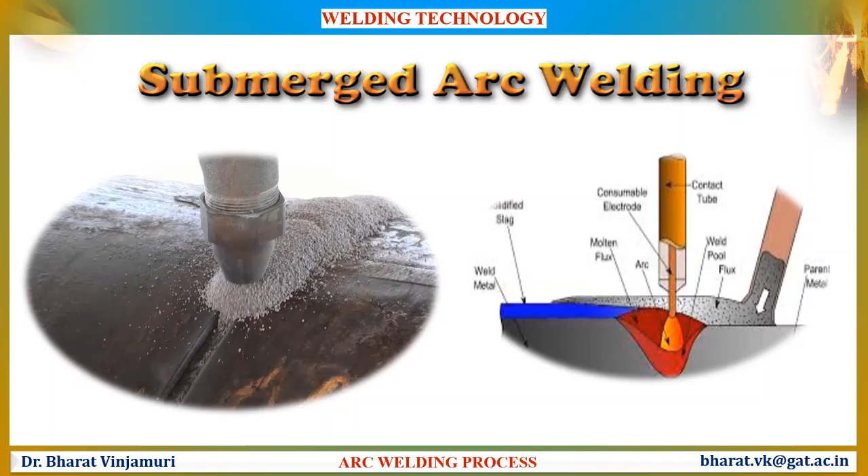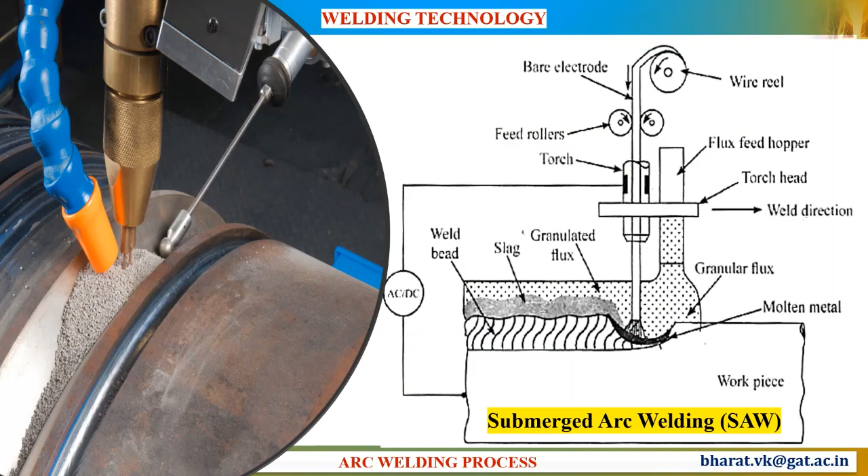In the previous session, we have understood the working of shielded metal arc welding process, which is also known as stick welding. In this session, we will be understanding the working of submerged arc welding process. This process has the ability to weld thick metals. The schematic diagram of this process is on the right side of the screen.

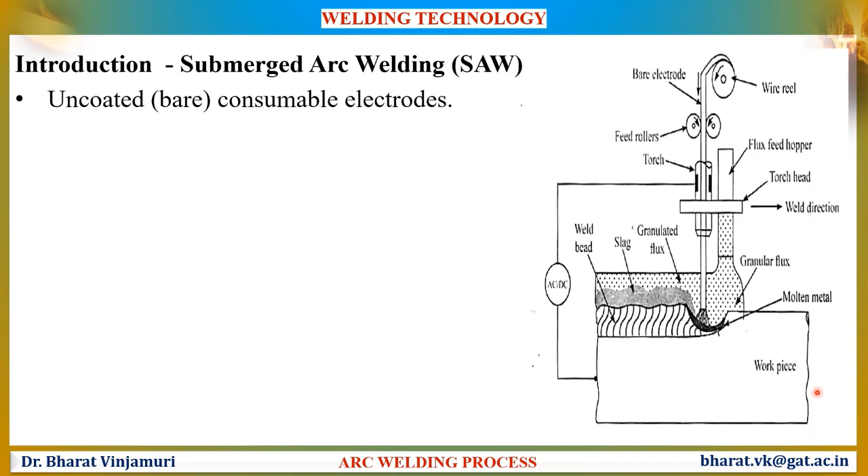The schematic diagram of submerged arc welding process can be seen on the screen. This process makes use of uncoated consumable electrodes which will be fed in the form of wires through rollers. The arc will be struck between these electrodes and the workpiece. Since the process makes use of uncoated electrodes, additional flux has to be supplied near the weld zone. This flux can be supplied through feed hopper.

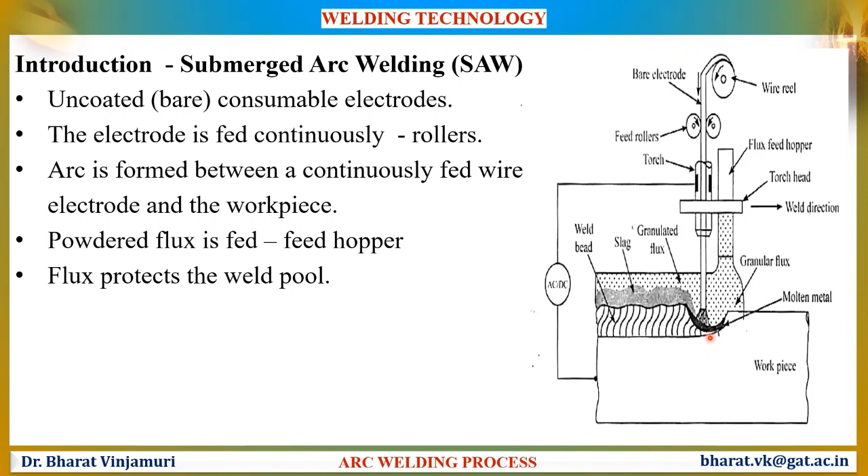Usually, flux in the form of powder is supplied at the weld zone. The flux protects the entire weld zone from the atmospheric contamination, avoiding formation of oxides. The entire welding area will be submerged under this flux, and hence the process is also called as submerged arc welding. This process is also known as hidden arc welding or sometimes high current welding process, as it uses a current up to 1000 amps. Either AC current or DC current can be used as a power source.

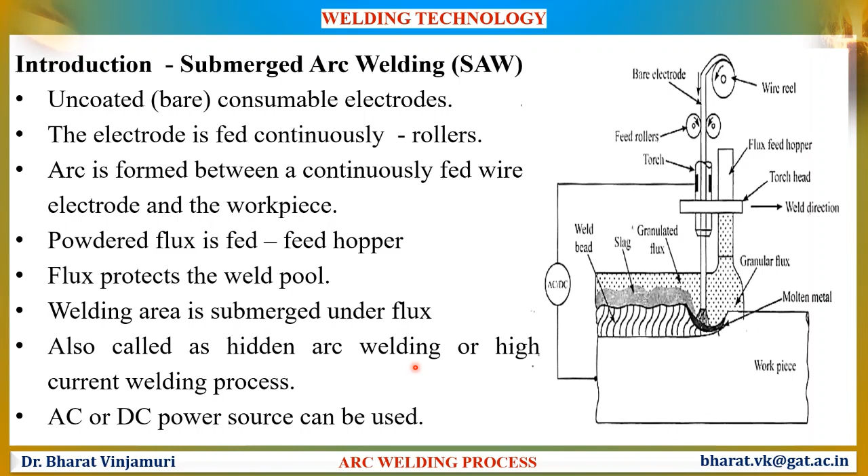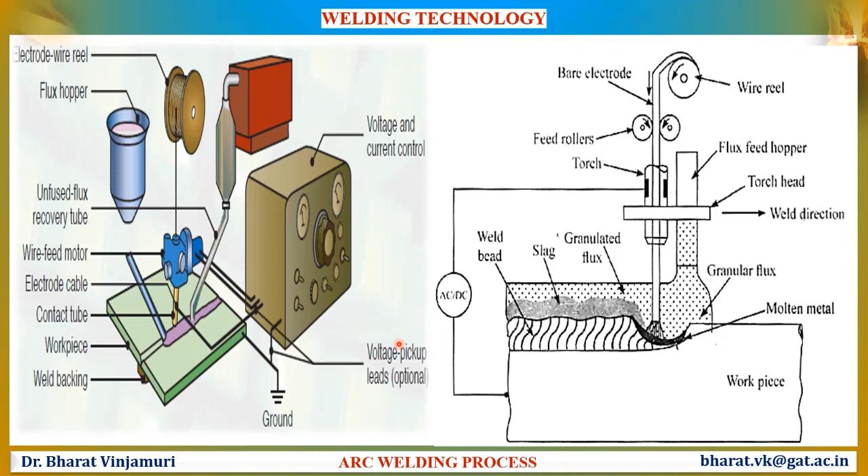Let us now discuss the operation of submerged arc welding process. Before starting the process, the weld zone along with the weld metal has to be cleaned to avoid the contaminants like grease, oil and dirt. Now, the flux from the feed hopper starts depositing near the weld zone. The flux can be oxides of calcium, silicon, magnesium, aluminum and manganese. The arc is struck between the electrodes and the metal piece.

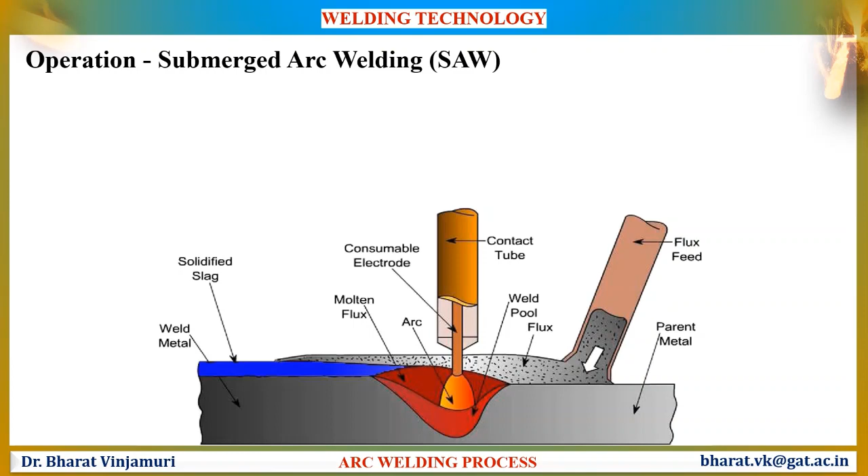Initially, the flux at its cold state will be insulator of electricity. Once the arc strikes, the flux starts melting and becomes conductor of electricity, thus maintaining a constant current supply at the weld zone. The molten electrode will start filling the gap between the metals. The flux melts and forms a slag over the weld zone. This slag floats on the surface, protecting the weld bead.

It has to be noted that the weld zone will be entirely protected by the flux and the slag will be protecting the weld bead. The solidification of molten metal takes place at a very slow pace because the entire zone will be submerged under the flux. After solidification, the layer of slag has to be chipped out and the entire weld will be cleaned.

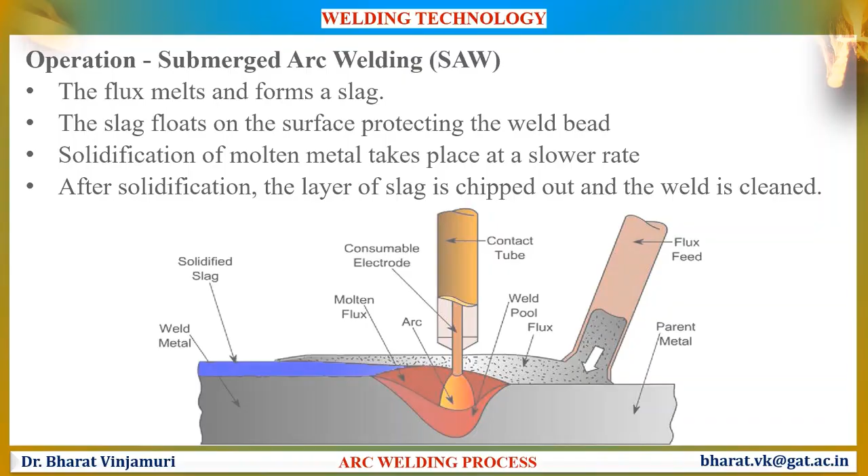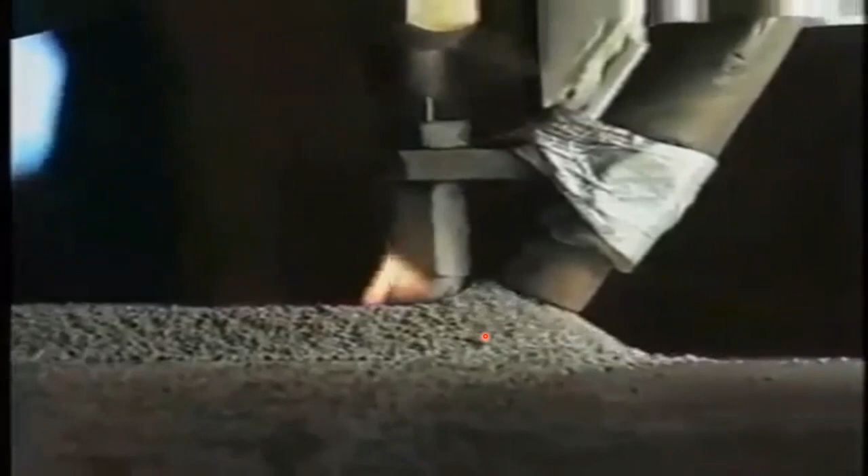Let us now see the actual working of submerged arc welding process. You can see on the screen that the flux is fed over the welding zone and the entire welding zone is submerged inside the flux. Since it is submerged, the process is called submerged arc welding process. There will be very limited control of the operator and the entire process is automated. This process can be employed to weld different types of materials. All types of steels can be welded, including the alloys.

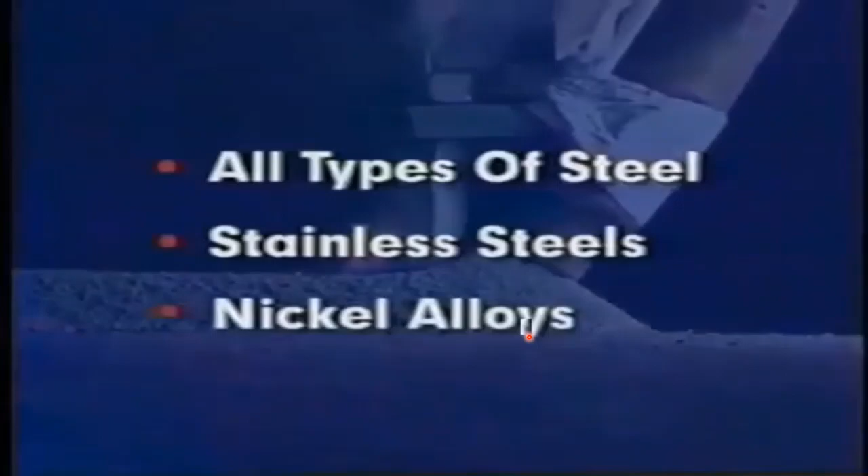Let us now compare shielded metal arc welding process with submerged arc welding process. Shielded metal arc welding process will make use of a stick electrode. That is why it has got a name, stick welding. But in case of submerged arc welding process, the electrode will be in the form of a wire which is continuously fed to the workpiece. In case of shielded metal arc welding, since the electrode is in the form of stick, we need to replace the electrodes frequently. But such a problem can be avoided by feeding the electrode continuously to the weld zone in case of submerged arc welding process.

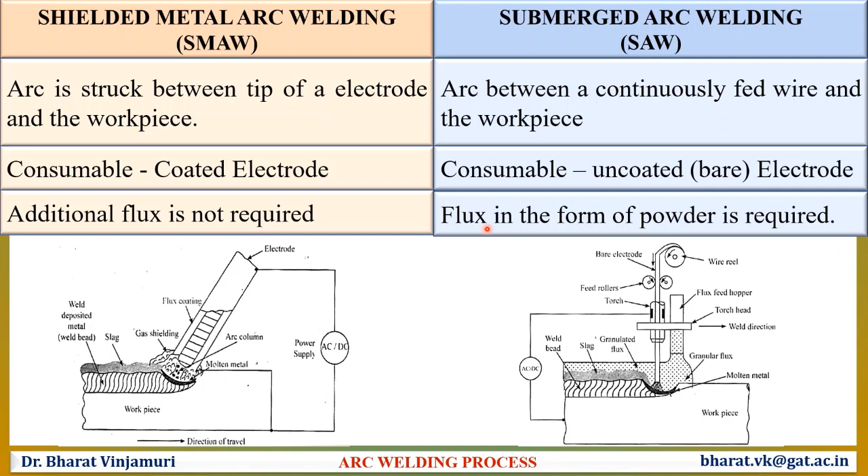Shielded metal arc welding process makes use of consumable coated electrodes. But in case of submerged arc welding process, uncoated consumable electrode will be used, thereby raising the need of additional flux. So it requires a flux in the form of powder. But in case of shielded metal arc welding process, additional flux is not required as the flux is coated on the electrode itself.

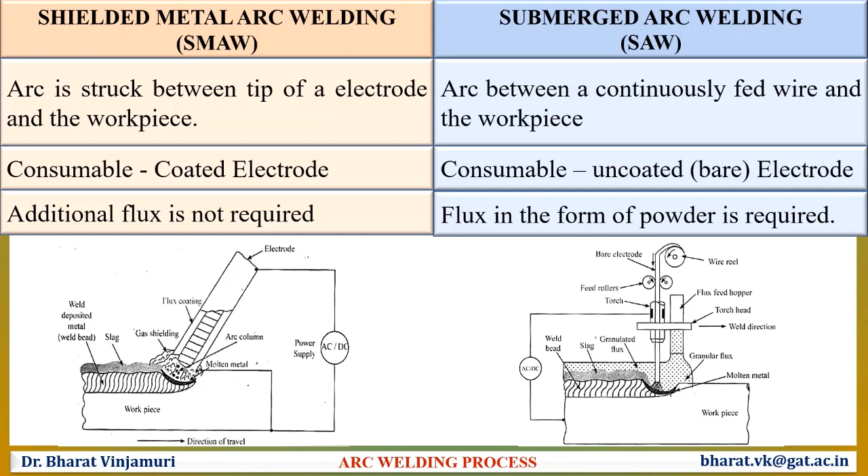In case of shielded metal arc welding process, the weld zone is protected from the atmosphere by the gas produced due to burning of coated flux. In case of submerged arc welding process, the flux itself will protect the weld zone from the environmental contamination. Both processes make use of either AC power source or DC power source. Since gas is produced, more smoke is produced in case of shielded metal arc welding process. And in case of submerged arc welding process, very less smoke is produced as the flux hides the arc.

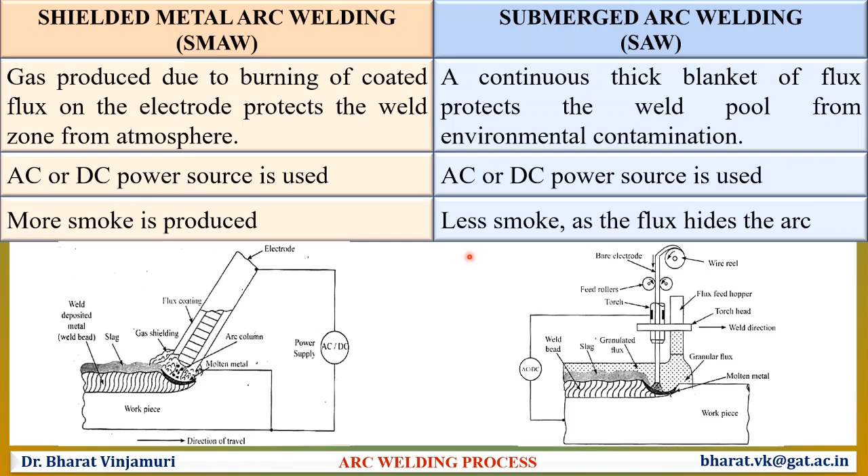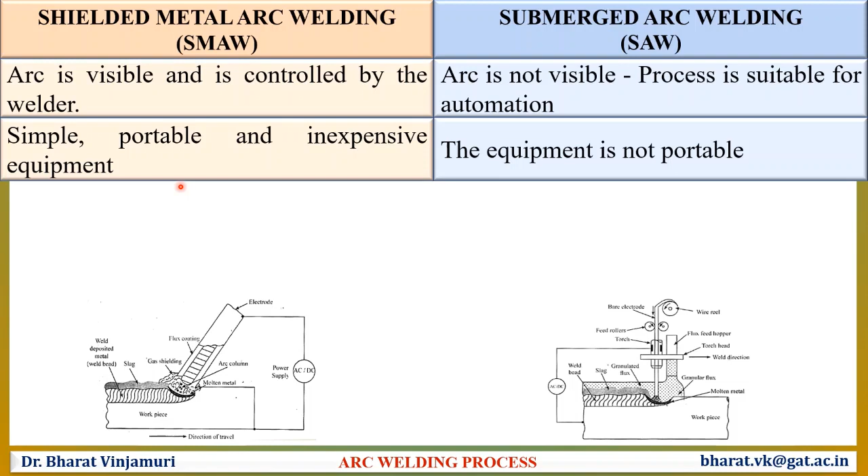The arc in case of shielded metal arc welding process is visible and hence the process is controlled by the welder. But in case of submerged arc welding, the arc is not visible because of the flux. Therefore, the process is automated. Shielded metal arc welding process is economical, simple and is portable. But submerged arc welding process equipment is not portable. In case of shielded metal arc welding process, the quality of weld will be less compared to submerged arc welding process. There will be spattering of molten metal in case of shielded metal arc welding process, but the same may not happen in case of submerged arc welding process.

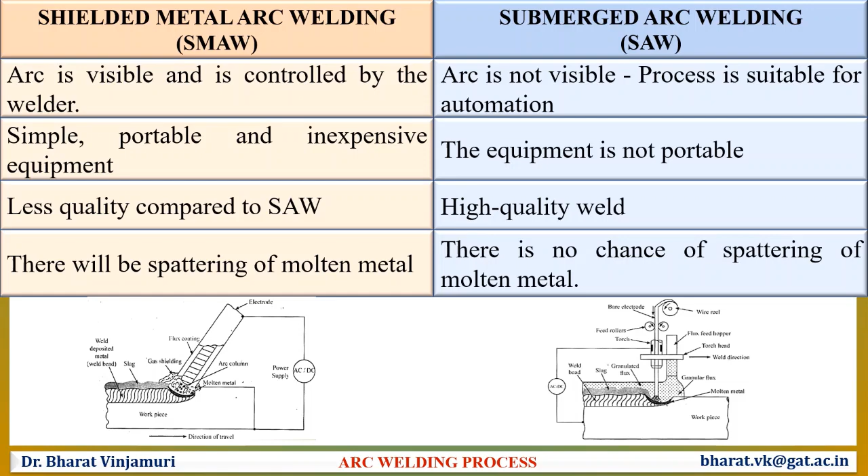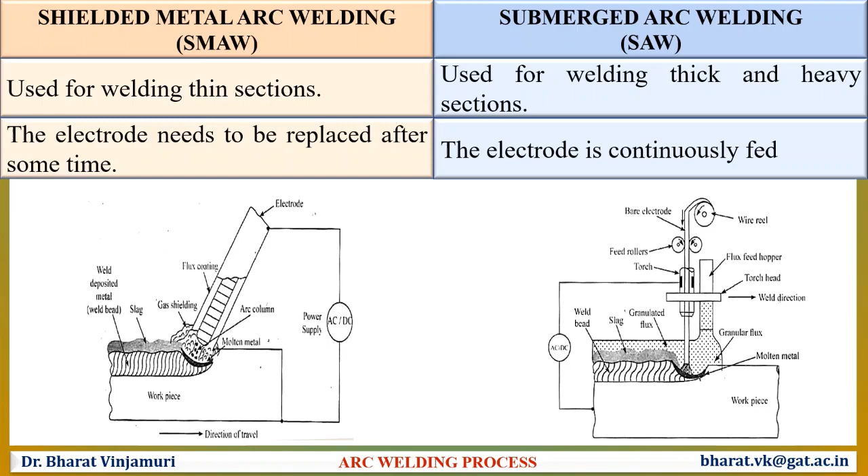Shielded metal arc welding process can be employed to weld very thin sections, but submerged arc welding process can be used to weld thick as well as heavy sections. In case of shielded metal arc welding process, the electrodes need to be replaced once they get consumed. But in case of submerged arc welding process, the electrode is continuously fed through rollers and hence there is no necessity to replace the electrodes. So these are the differences between stick welding and submerged arc welding process. So these are the relative advantages of submerged arc welding process.